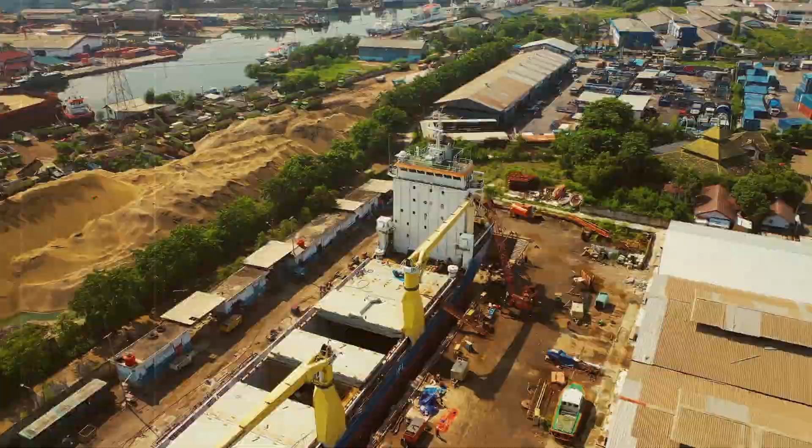Watt married Margaret Miller in 1764, and together they had two sons and a daughter. After Margaret's death in 1773, Watt remarried to his cousin, Anne MacGregor, in 1776, and they had five children.

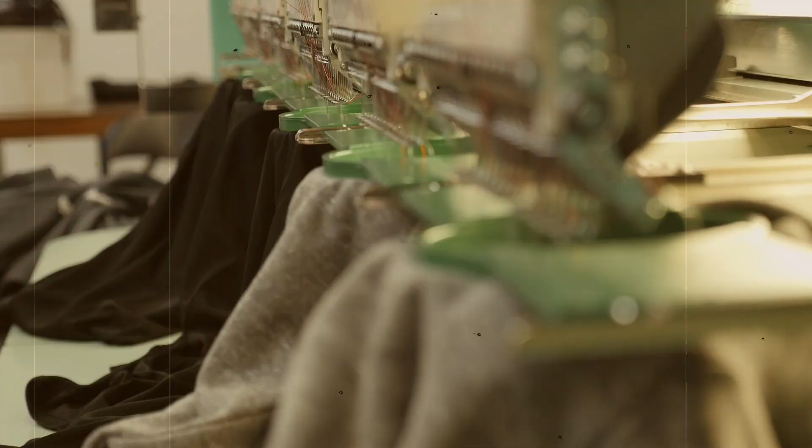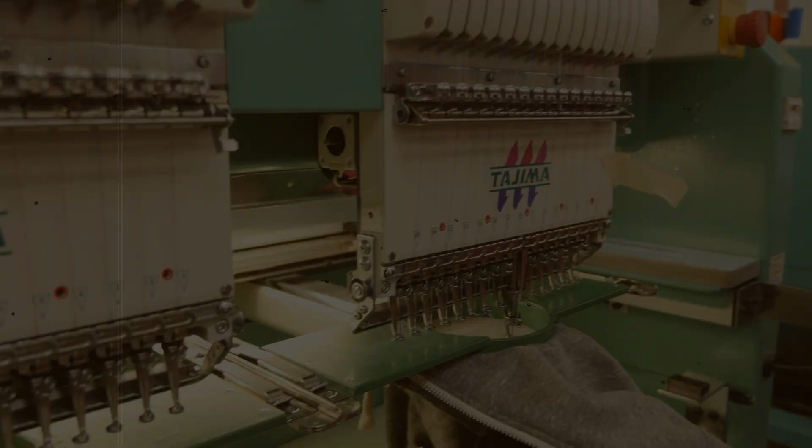Apprenticeship and initial work. Watt was apprenticed to a mathematical instrument maker named John Craig at the age of 18. This apprenticeship allowed him to refine his skills in mechanical design and understand the principles of precision engineering. After completing his apprenticeship, Watt moved to London in 1757 to work for another instrument maker.

However, his health issues continued to trouble him, and he returned to Glasgow in 1759 to continue his work independently. It was during this time that Watt began focusing on the design of scientific instruments, particularly for the University of Glasgow.

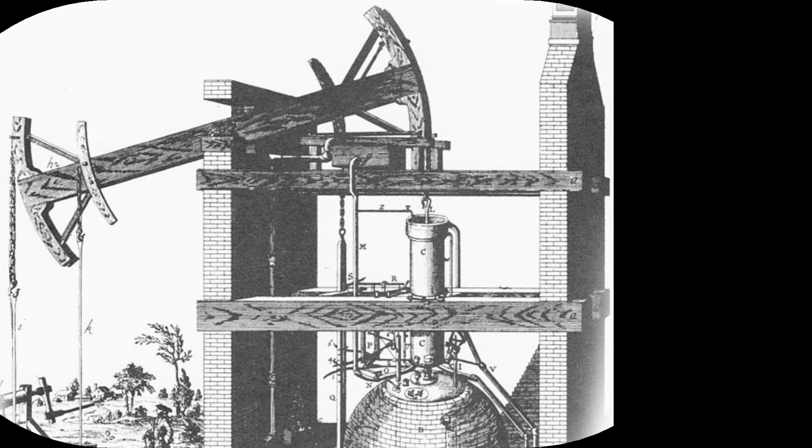Meeting with William Murdoch and early innovations. Watt's breakthrough came in 1763 when he was asked to repair a model of a Newcomen steam engine at the University of Glasgow. He found that the engine was inefficient due to the wasteful use of steam.

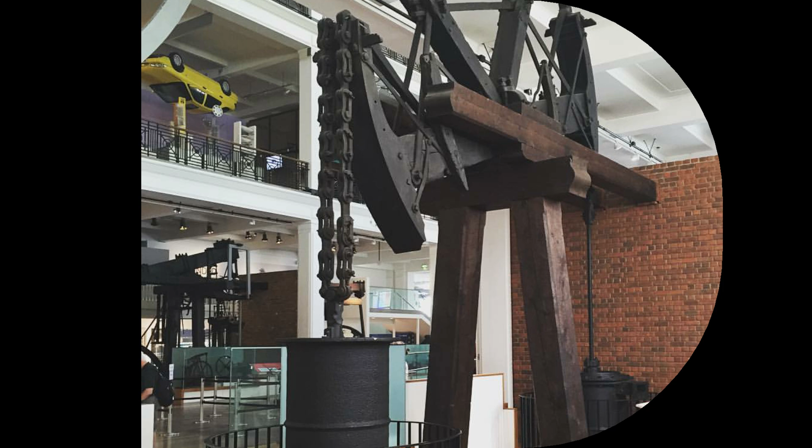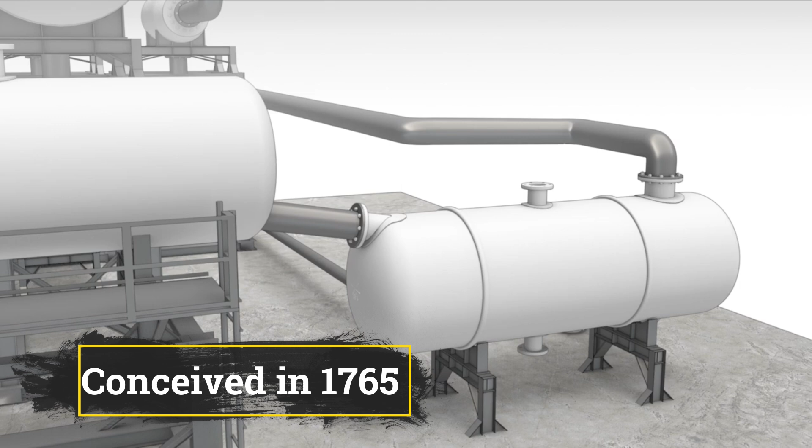The development of the separate condenser. Watt's first major innovation came with the design of a separate condenser. This improvement, conceived in 1765, greatly increased the efficiency of steam engines by preventing the engine from cooling down every time it performed a cycle.

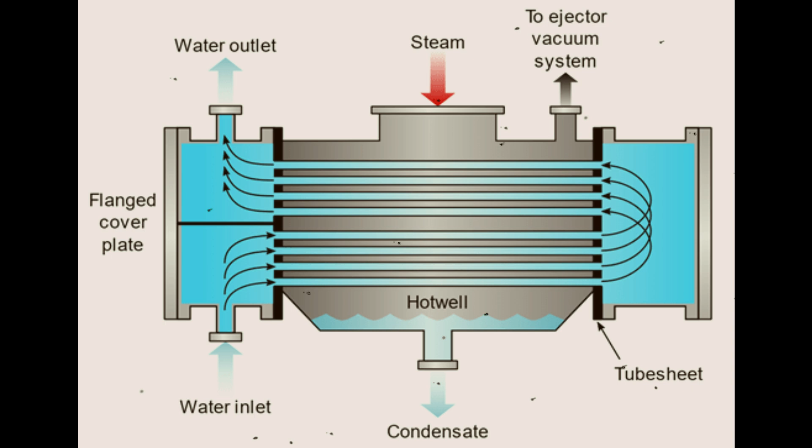Watt's development of the separate condenser was revolutionary, as it allowed the steam engine to run continuously without wasting energy. He filed a patent for his idea in 1769, but the invention would still require years of development and refinement before it could be used practically. Watt's work on the separate condenser marked the beginning of his long collaboration with entrepreneur Matthew Boulton.

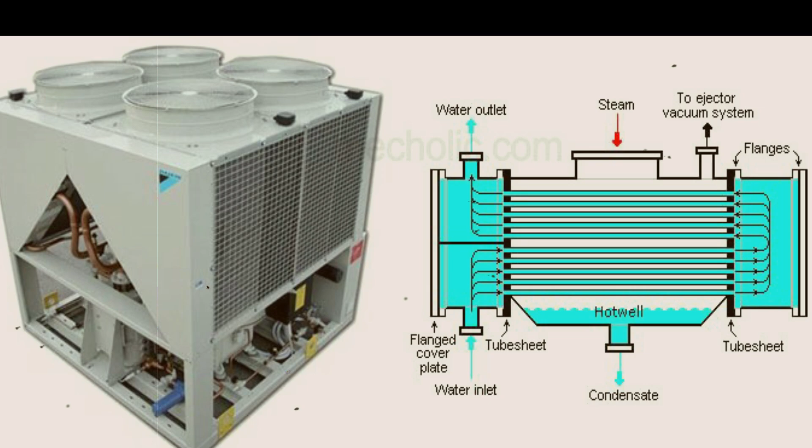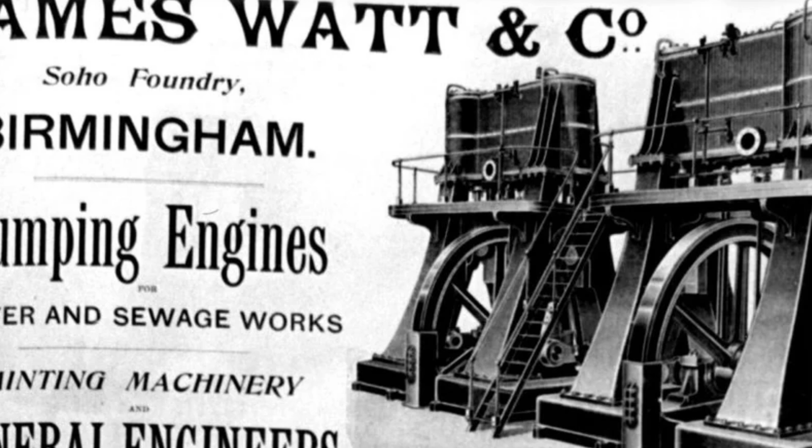Collaboration with Matthew Boulton. In 1775, Watt entered into a partnership with Matthew Boulton, an experienced manufacturer and businessman. Boulton's company, Boulton and Watt, would become the principal manufacturer of Watt's improved steam engines. This collaboration was pivotal in turning Watt's theoretical designs into practical, mass-produced machines.

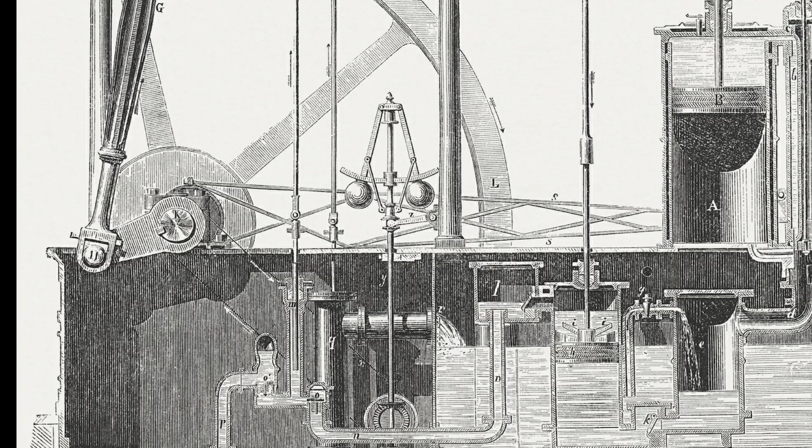Boulton's expertise in business and manufacturing complemented Watt's engineering skills, and together, they revolutionized the steam engine industry. The partnership allowed Watt to focus on innovation while Boulton handled the production and sales.

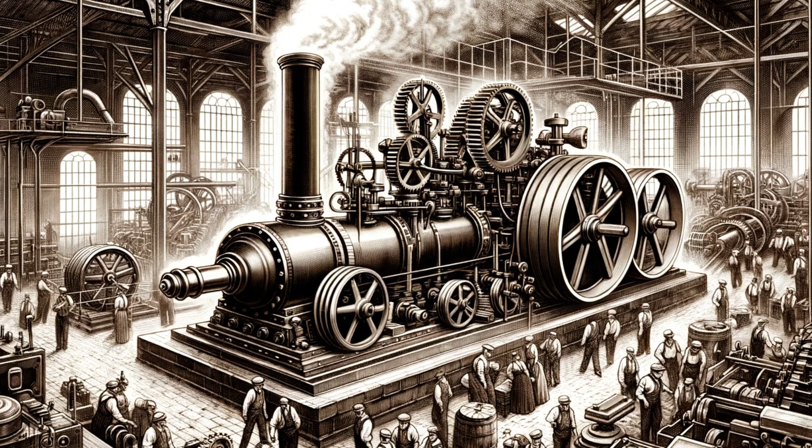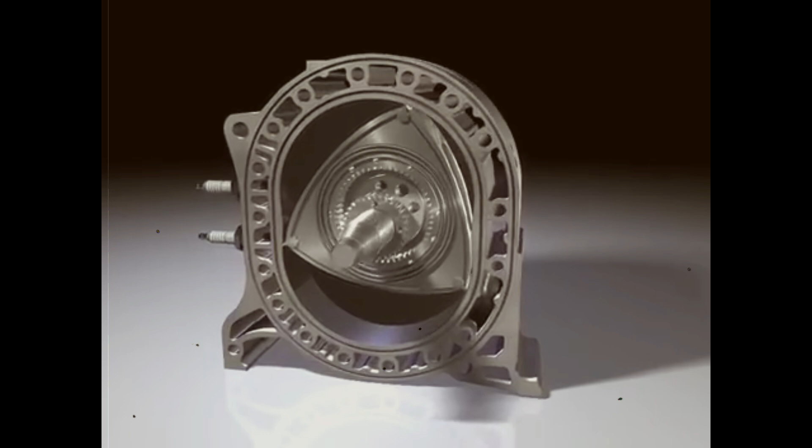The rotary motion engine. One of the key developments in the history of steam engines was Watt's invention of the rotary motion engine. Prior to this innovation, steam engines were used primarily for pumping water. Watt's rotary engine could drive machines in factories, mills, and mines, significantly expanding the scope of the steam engine's utility.

The rotary motion made it possible for steam engines to be used in a variety of industrial applications, from textile manufacturing to metalworking. This invention was a crucial step in the Industrial Revolution, enabling mechanization on a much larger scale.

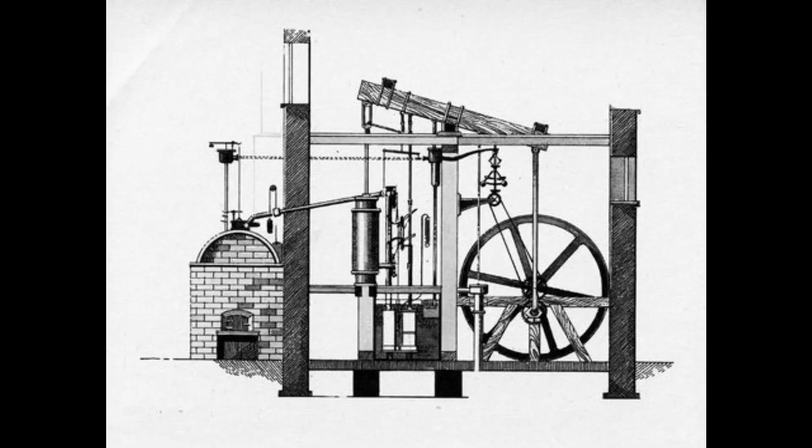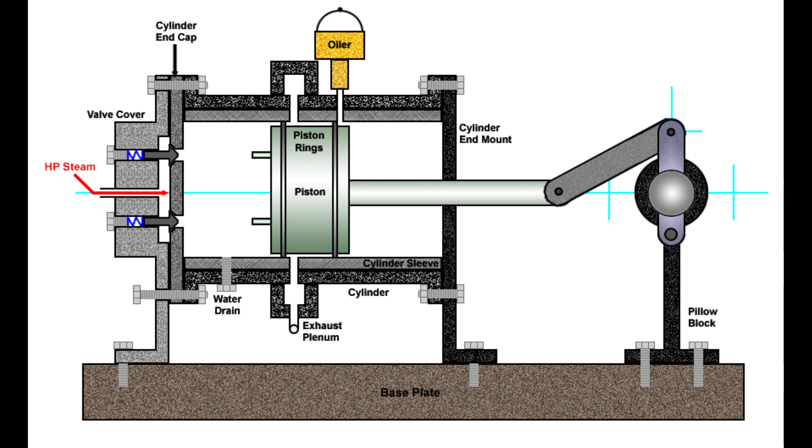In particular, the issue of the double-acting steam engine was hotly debated, as Watt had to defend his innovations in court. Despite these challenges, Watt's patent stood, and he successfully maintained control over the key elements of his steam engine design for several years. However, after the expiration of the patent in 1800, other inventors were able to build upon

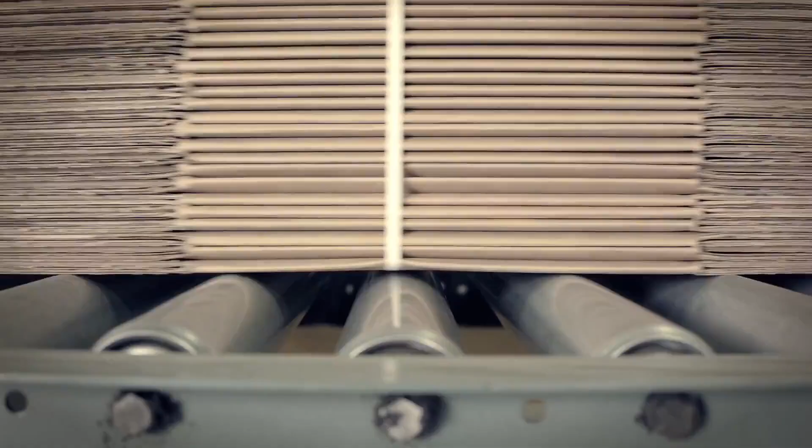Watt's work and further improve steam technology. Expansion of business and global influence. As the demand for steam engines grew, Boulton and Watt expanded its business operations significantly. Watt's engines were shipped to various parts of the world, including to the United States, where they played a crucial role in the development of the American industrial landscape.

The engines were used in a variety of industries, from mining to transportation, and contributed to the spread of industrialization across Europe and the Americas. In his later years, James Watt continued to refine his steam engine designs, contributing new ideas to improve efficiency further.

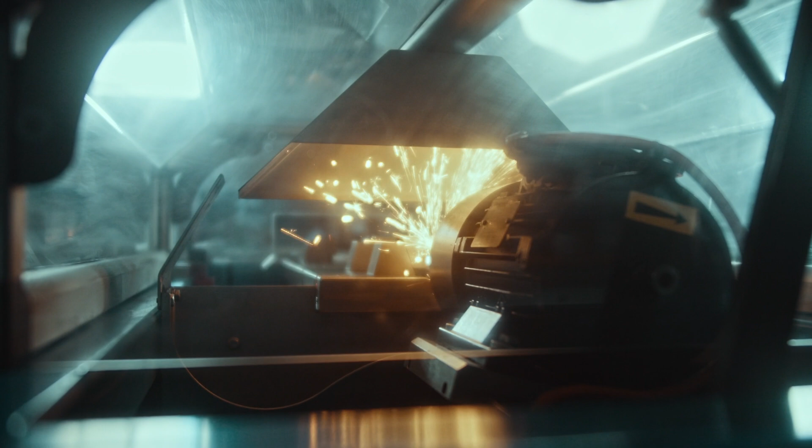Death and recognition. James Watt passed away on August 25, 1819, at the age of 83, in Heathfield, near Birmingham, England. His death marked the end of an era in the history of industrialization, but his legacy lived on in the widespread use of steam engines.

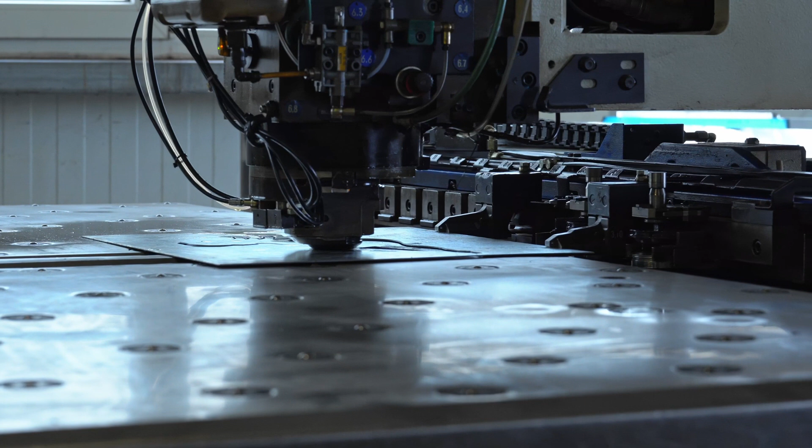Watt was widely recognized during his lifetime for his innovations, receiving honors from the Royal Society and other scientific institutions. His contributions to the Industrial Revolution were acknowledged by both his contemporaries and future generations. In the years following his death, Watt became one of the most revered figures in the history of science and technology.

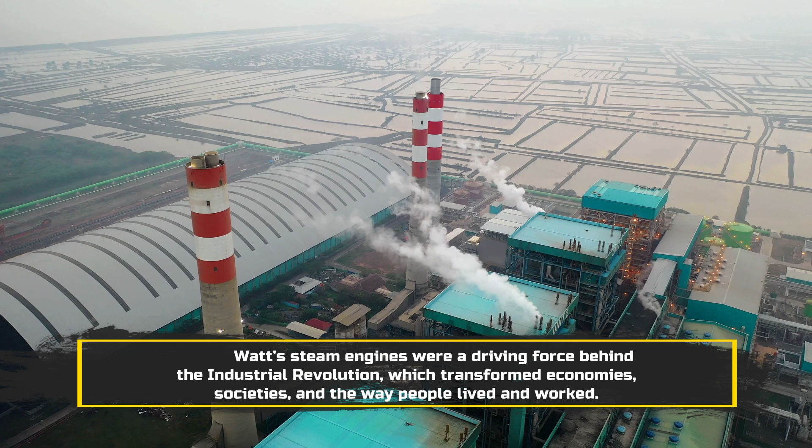Lasting impact on technology and society. James Watt's steam engines were a driving force behind the Industrial Revolution, which transformed economies, societies, and the way people lived and worked. The efficiency improvements he introduced to steam power had lasting impacts on manufacturing, transportation, and urbanization.

His work paved the way for the development of modern industry, making possible innovations such as the steamship and the locomotive.